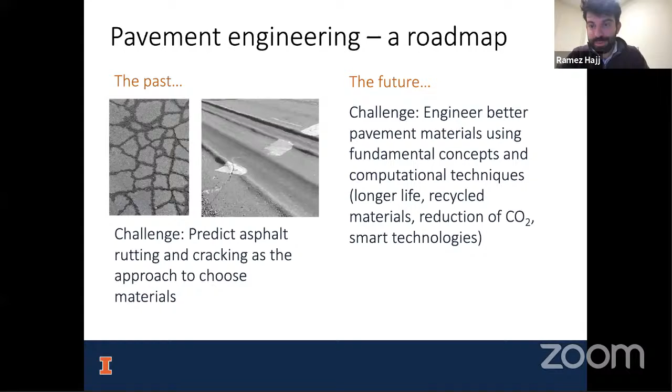Now, in the future, what are our challenges? We need to engineer better pavement materials. We cannot keep going with the same old materials. We've already seen the introduction of polymers and other more advanced materials. As we're doing this, our aim is a longer life, using more recycled materials, reducing CO2, and making our pavements smart. So now we want to take all the things we've done in the first part and apply them here, to challenge ourselves to engineer new 21st century materials that are sustainable.

A lot of the problems in the asphalt world start with the binder. So what is asphalt binder? It's the binding agent in flexible pavements. It's obtained primarily from the fractional distillation of crude oil, but it also occurs naturally. You see some natural asphalts in certain places, like Venezuela and Trinidad. There are certain parts of the world that have a lot of it, but generally for our purposes, we are focused more on this fractional distillation of crude oil. Essentially, this is the heaviest fraction of the crude oil, or the bottom residue, and that's what produces our binder.

And in essence, we mix the binder with aggregates in approximately a ratio by weight of 5% to 95%. And the binder is extremely complex.

If you studied more about concrete, maybe many people here have a background in Portland cement concrete. Portland cement doesn't look too different whether you're in the United States, India, Brazil, Europe, or anywhere. But asphalt binder looks quite different. It has a huge geographic variation because of its complex chemical composition. I won't get into too many details, but the important thing to take away is that every single binder is different, which means every single mixture is different. No two are the same, even if sourced from the same source—different batches from the same source will still have differences. So it's very critical that we think about the complexities associated with the chemical composition and how to properly know what type of binder we want to use.

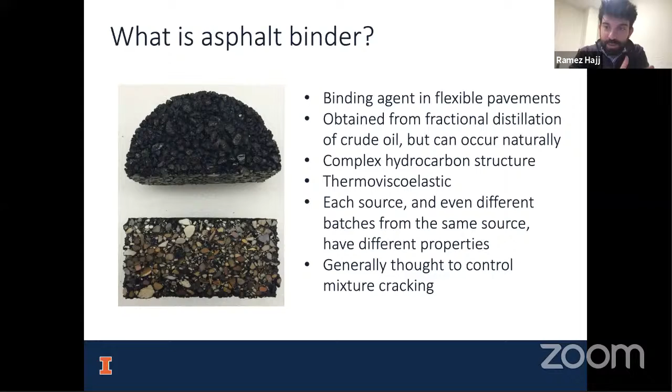Each source, and even different batches from the same source, have different properties. And finally, when we see cracking in the pavement, like I showed on the previous slide, the asphalt binder is generally what's controlling the cracking. So it's extremely critical, and we cannot neglect the binder if we want to talk about safety or sustainability of our road. We have to start with the binder, I believe.

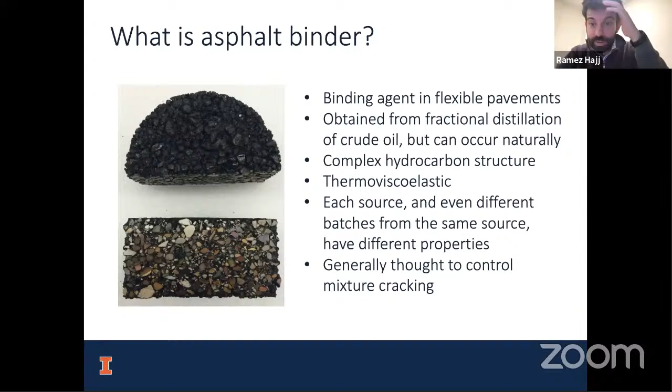Just take a sip of coffee. Okay, it's very early in the morning here.

So what are the new challenges in binder sustainability? Well, there's three I'd like to start off with, and then I'll talk a little bit about safety as well. The first one is recycled asphalt.

We have a chance right now with recycled asphalt to basically revolutionize the paving industry. This is for the United States—I'm assuming there's even more potential in India based on the huge population that Dr. Krishna mentioned. In the United States, we reclaim 90 million tons of asphalt each year, and we recycle approximately 80% of that, so about 75 million tons of asphalt is recycled. Based on this, we can have a cost savings of $30 to $80 per ton, which is pretty huge. But this is quite a large range and really depends on the material quality.

More importantly, we can make a huge impact from a sustainability perspective. When we reclaim the old pavement, we can prevent the need to produce more asphalt. The more reclaimed pavement we can use in asphalt mixtures, the less we have to rely on distillation of crude oil, which is a process that leads to huge carbon emissions, a very big carbon footprint, and is generally not a sustainable practice. So we like to reclaim asphalt—we hope that it's sustainable.

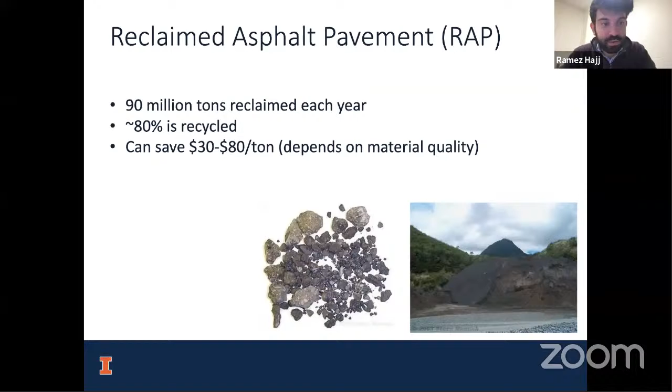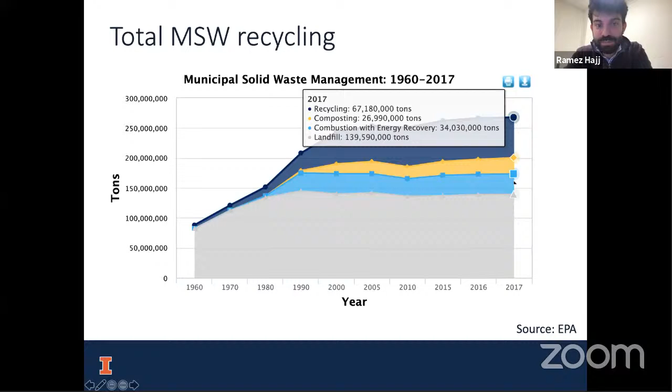Just to give you an idea how big this industry is in the United States: if you look at our total municipal solid waste—things like disposable plastics, disposable aluminum, those kinds of products used in cities—you'll see that 67 million tons of those everyday products are recycled. Compare that to asphalt, where 80% of 90 million tons is recycled—so actually more asphalt is recycled than all these municipal products combined. Just to give you an idea of the scale, asphalt recycling is probably the biggest recycling industry in the United States. Asphalt can actually become the world's most recycled material. This is not a small niche industry—it's a huge operation that involves everyone. And if you can use more and more RAP and maintain good pavement performance, you can see how this can go extremely far in producing sustainable roads.

However, there's still a lot of challenges associated with using RAP. The major challenge is the compatibility between RAP and virgin asphalt. When we heat the RAP material, we have to remember this material is not like our virgin asphalt. It's a very stiff material, heavily oxidized, and difficult to mobilize and mix at normal temperatures. For example, we use about 150 Celsius usually for mixing regular virgin asphalt mixtures. This might not be adequate for RAP because the material is so stiff and has a high adhesion to the aggregate, which creates difficulty for us.

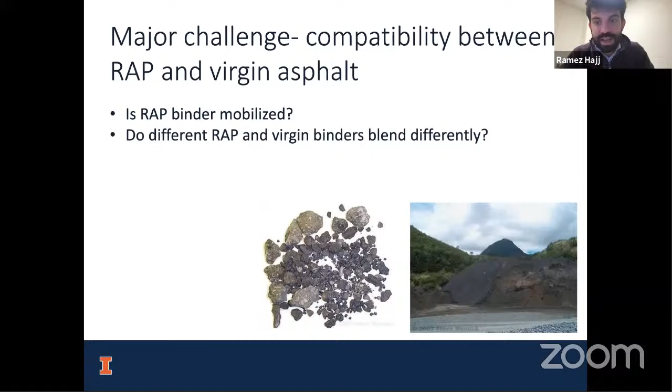The other challenge is certain RAP binders and virgin binders may not be as compatible as others. We cannot just assume every RAP mix is the same. We have to consider compatibility as we move through the process of a RAP mixture design. However, the vast majority of designs do not account for this. They just say, get 30% RAP or 40% RAP and mix this into your asphalt. This won't work well because if it's not compatible with the virgin asphalt, the RAP essentially acts like a rock, which means you'll have an inadequate binder content, and these aggregates will strip or crack immediately.

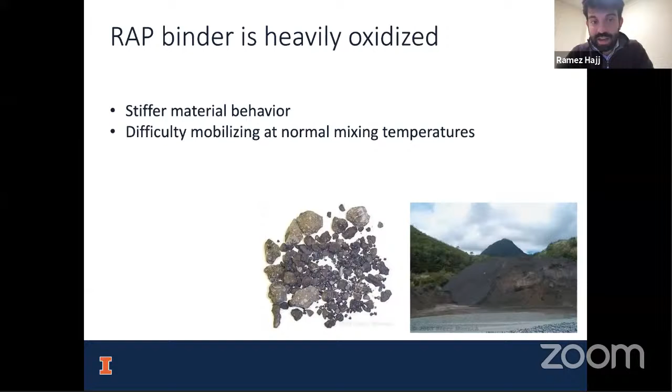You'll have loose aggregate at the surface. Now, when you have loose aggregate at the surface of an asphalt pavement, this creates a huge safety issue because that loose aggregate flies up and hits the next vehicle's windshield and can crack it. So this is not something we can take lightly, and it's something we need to explore.

This is something my research group has been working on. This was a collaboration with Dr. Anand Sreeram and Zhen Leng from Hong Kong Polytechnic University, and the other author is my PhD advisor, Dr. Amit Bhasin from UT Austin.

This is a procedure we developed quickly to check the extent of aging in RAP based on solubility. The idea is you titrate this small specimen with something that dissolves asphalt. When you see solubility appear, you understand how much solvent it takes to dissolve this material, or how much dispersive force this material has. We can easily convert this to the amount of dispersive forces present. If the material is not very dispersive, that means it might create recycling difficulties because the binder is too stiff and too brittle to be mobilized. So we predict this may lead to difficult binders to recycle.

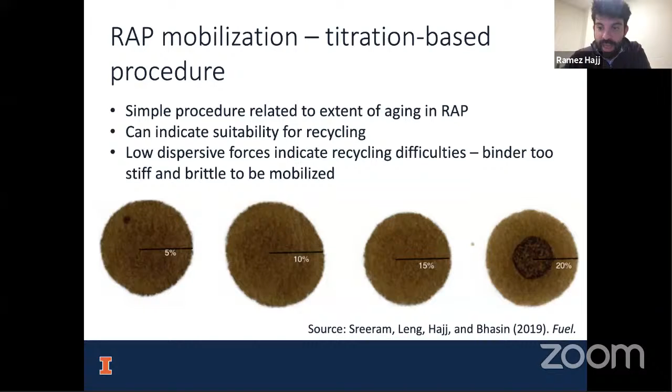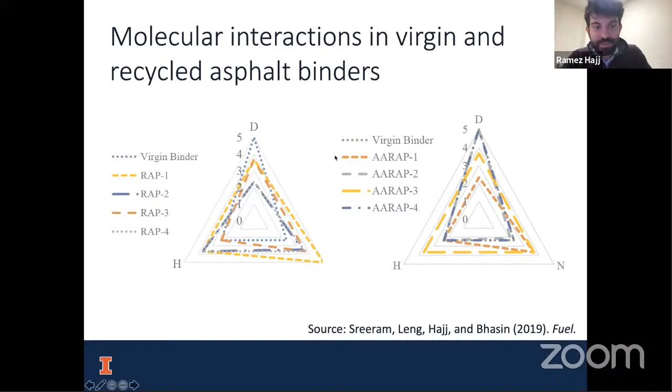Again, we cannot just assume RAP is all the same. These are actual RAP specimens from the field, and these are artificially aged in the lab, and we see that phenomenon regardless. So this is not just an effect of laboratory experiments, it actually occurs in the field as well.

So this is an issue that really needs fixing and needs more study. These 2 papers we've written help bring this issue to the front, hopefully for researchers in pavement sustainability, but we're just scratching the surface now, and there are more unanswered questions than answered ones. I hope that in the future, researchers will focus on developing and understanding how we can create sustainable pavements, but from a scientific perspective, not just treating every material as the same when we know it's not.

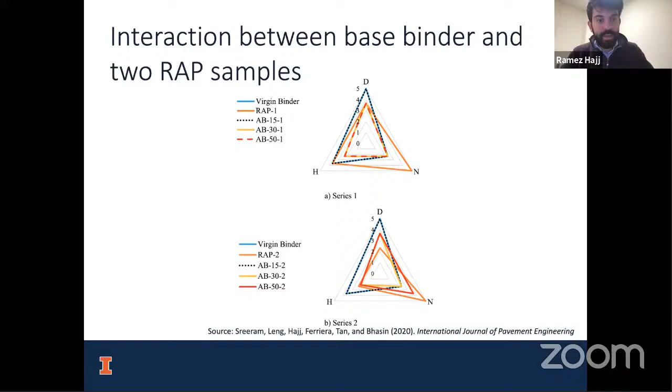Okay, take another sip of coffee.

Okay, so our second challenge is going to be rejuvenation. So what do I mean when I say rejuvenating or softening the binder? Well, the problem we just talked about where RAP becomes heavily oxidized, there is some remedy for this. And what we can do is we can use softeners.

In these softeners, we have many materials. We have rejuvenators. Rejuvenators are often proprietary, and these are kind of on the more expensive side. These are materials that are basically some kind of liquid rejuvenator, a low viscosity liquid that we add to the RAP binder to decrease the viscosity and make it flow more easily. But these are pretty expensive and they're patented materials, so we can't just go use them whenever we want.

So there's been a lot of interest in new softeners or rejuvenators, such as biomaterials. Some of this is animal waste. Some of this also includes cooking oils, so if we're using oil for cooking, we can recycle that in this form. I have done some work in this area also. And then there's high maltene oils, which are just lighter fractions of the crude oil. It's not ideal to use these because it's contributing to crude oil distillation, which we want to reduce. But in some cases, this can be a powerful tool for rejuvenating our binder.

And again, no matter which rejuvenator you're choosing, the idea is the same. You add a low viscosity material to the very high viscosity, stiff, brittle RAP, and this will combine with the RAP to make it softer.

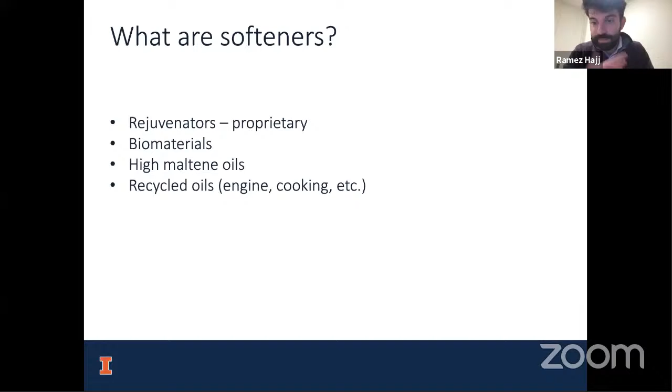But the big question for these materials is, what content should we use? How much rejuvenator do we need? This work is co-authored with one of my PhD students and his master's advisor. And we noticed that in this case, there's a pretty wide range that you can use.

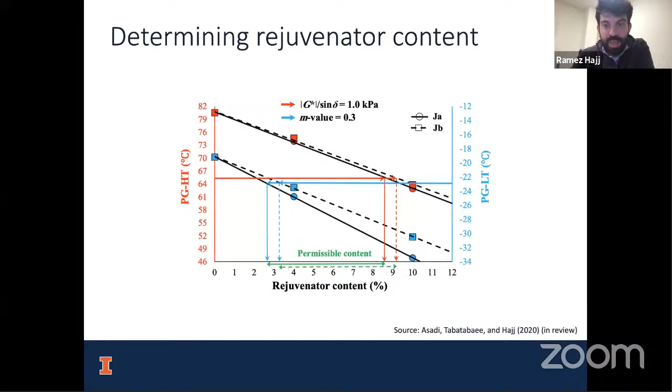So for example, here are two types of rejuvenators. Ja is an industry rejuvenator, and Jb is a waste cooking oil rejuvenator. In both of these cases, you can use almost anywhere from 3% to 8.5%, 9%, and you can still maintain the same grade of your binder based on the PG system, which is the classification system we use in the US. So if you can still maintain your same binder grade in this wide range, you don't have a good idea of how much to use. Should you use 3%? Should you use 9% of the rejuvenator? So we developed a system based on the linear amplitude sweep binder testing method.

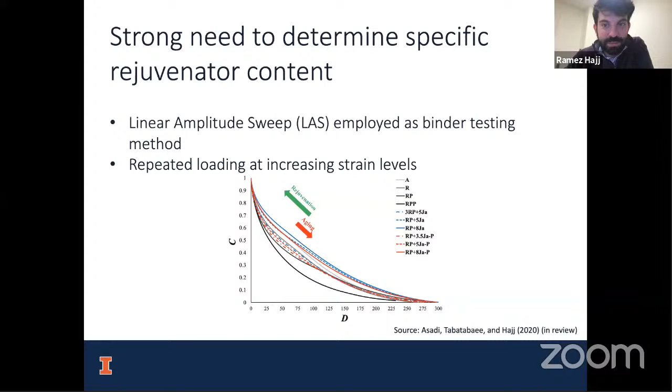The idea here is that it's a fatigue test, where we check what is the fatigue life of the binder from many different perspectives. First, we looked at the damage evolution, and you can see here that the damage at failure of these binders is about 30% for an unaged asphalt. A represents unaged, R is short-term aged, RP is long-term aged, and RPP is doubly long-term aged. These are increasing levels of aging, and you'll see that it takes less and less damage to fail the material.

But then you can see as we rejuvenate it, it starts to go back up. And in some cases, it even passes the original material, which is why I say rejuvenation is a bit of a misnomer. It's not necessarily the correct name for the mechanism, because in some cases, when we add so much rejuvenator, we're actually making the material properties even better than the original material properties. And what this means is that this is not a rejuvenation or restoring of the original properties, it's just a softening.

And we can see that when we re-age it, we're able to keep some of those properties. And then finally, we can do many cycles of rejuvenation and maintain almost the same properties as the original. So this is quite powerful because we can know that we can recycle the material, let it live another life in the pavement, and then recycle it again with the help of rejuvenators.

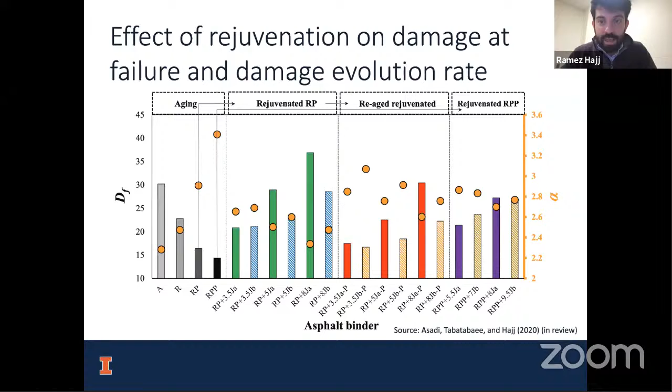We looked at fatigue life too. Same phenomenon here: as we rejuvenate, we see better than the original fatigue life. So even in the unaged original binder, we are able to restore better properties with rejuvenation. This is at a lower level of strain, and this is at a higher level of strain.

Crack growth rate, same thing. Here's our original binder, and here's our rejuvenated with 8%. So the more rejuvenator we use, the better performance we see.

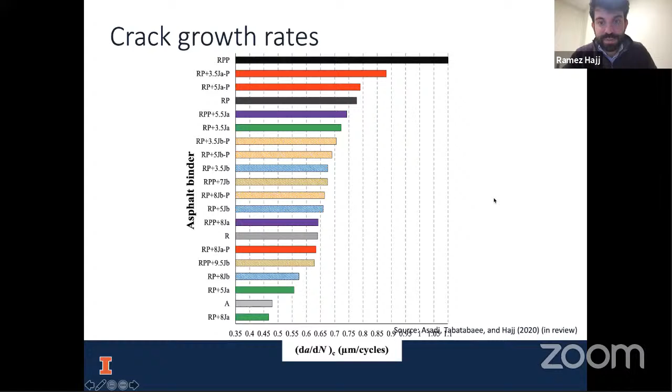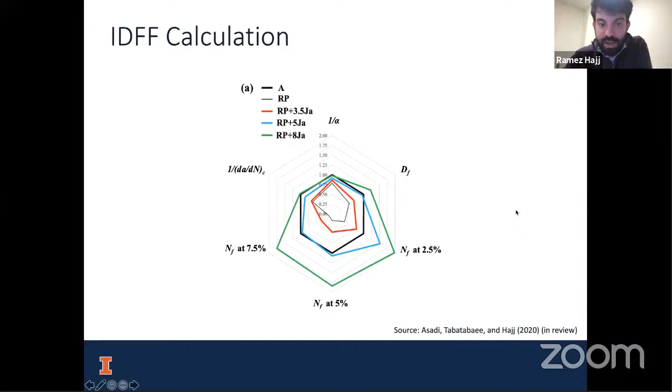And then finally, we created a parameter to help us, based on all those characteristics, determine the most efficient rejuvenation rate, based on the number of cycles to failure in a fatigue test at all these different strain levels, based on the crack growth rate and based on the damage properties. This method allows us to very efficiently choose a rejuvenator content based on how much we want to rejuvenate the binder. So if we want to restore the original properties, for rejuvenator A, we use 5.1%.

This is the aromatic extract. For rejuvenator B, which is the waste cooking oil, we'll use 8.3%. And we have a very targeted choice here. So this helps take the guesswork out of what I discussed before, where we use 3 to 9%. If we only want to restore 75% of the original properties, we can use as little as 2.7% or 3.6% rejuvenator. So this is, again, quite a powerful tool for us in asphalt paving, because this gives us a lot of options to restore those original properties.

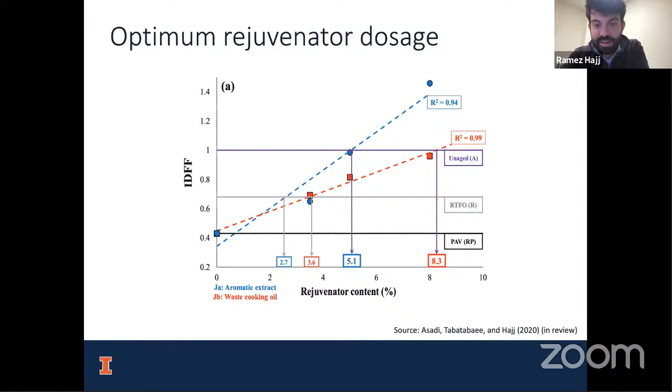And this is really going to be the key to unlocking the use of high amounts of RAP. As I mentioned, we could use 15% RAP without much consequence in the mix, but if we want to use 30%, 45%, 60%, we're really going to have to do something more advanced. This is one way in which we can do it. So this is the kind of work that we are super excited about, and we think can make a big difference to the asphalt industry.

Finally, the last category I want to talk about is new asphalt replacement materials. So when I say new asphalt replacement materials, what am I talking about? I'm talking about materials that we can use as a total replacement for asphalt. The idea is that we eventually want to have mixes where at least 50% of the material is not being used from virgin asphalt sources.

One option is RAP, but as we mentioned, we're already using a lot of RAP, and RAP is still an asphalt mix - it still has a lot of the same drawbacks. So we are investigating new materials. One of the most common ones you might have seen come into play recently is, of course, the use of recycled waste plastics. Recycled waste plastics in asphalt materials is a huge new popular area that has caught on a lot. And this is an area that, if we can find a way to do it efficiently, can really change the world of asphalt paving.

So when we use, for example, recycled waste plastics, we need to make sure it's compatible. If we want to use it for, say, 50% of the mix, we have to make sure it's compatible with asphalt, and this is no easy task. So we have all these plastic wastes right now - plastic spoons, forks, plastic dishes, all sorts of things that we want to recycle. And all of those are a little bit different, so we have to figure out an appropriate way to recycle these without compromising performance or safety of the asphalt mix. But today I didn't want to talk about plastics too much because I think this has been talked about. I wanted to talk about another project we worked on that had to do with sulfur.

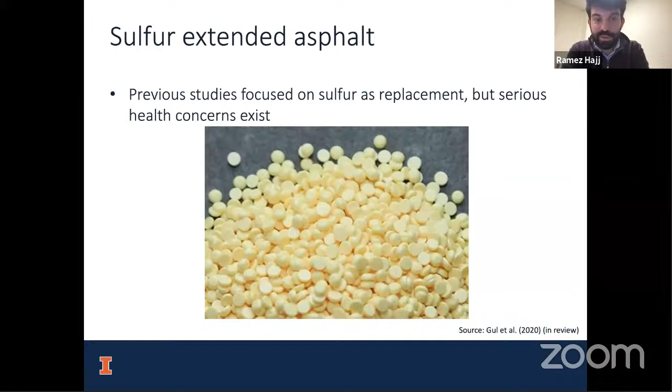So in this case, we evaluated sulfur extended asphalt mixtures using two tests: the Hamburg wheel tracking test and the Illinois flexibility index test, also known as the IFIT.

The Hamburg wheel test is a typical rutting test. This test is used to apply big steel wheels to the top of the asphalt mixture, and we check how much permanent deformation occurs in the wheel path. This is analogous to rutting.

Rutting is one of the most unsafe asphalt pavement distresses, because in pavement that ruts, you will have a depression in the wheel path. When it rains, these depressions fill with water and the vehicle will not be able to stop because there's water in between the tire and the pavement. This is going to create a huge problem for us if we are not careful. So we definitely want to make sure the rutting performance is just as good.

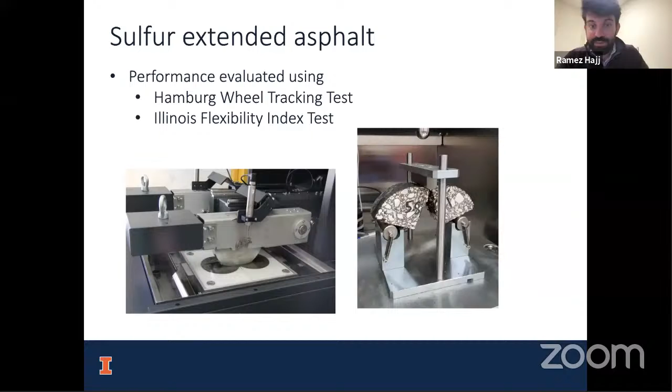And then we have the cracking performance. Cracking leads to infiltration of water into the structure and destruction of the pavement structure. So if we have either rutting or cracking, we're going to have huge structural issues, which lead to huge safety issues. These are very important and very critical tests to run on any replacement material. If your replacement material is not performing as well as your original asphalt mix, your technology is not sustainable and it's not safe. So we have to check these things before incorporating any such technology.

Rutting actually generally improved with the addition of sulfur. The most permanent deformation was observed with 0% sulfur. Then as we increased to 15, 30, and 45%, we saw a continuous decrease, although these are all statistically very similar. We did see quite a good impact of the addition of sulfur, so we felt good about using this from a rutting perspective.

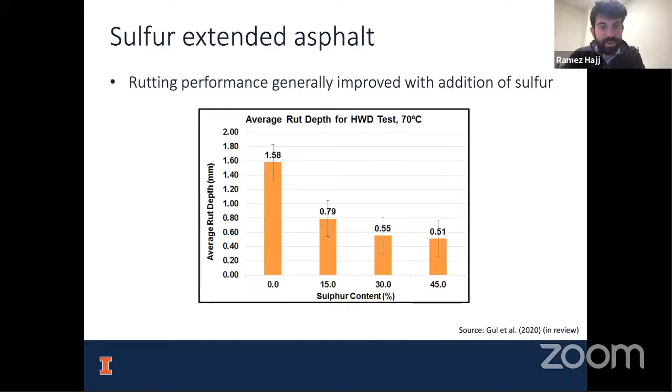However, what about a cracking perspective? We saw more mixed performance, to be honest. At 0%, we did see the highest fracture energy, meaning it takes the most energy to fracture the mix. So the non-sulfur mix performed a little better, but the peak load of the 30% sulfur mix was the highest.

This is important because fracture energy is how much energy it takes to fracture the mix, meaning how much it can deform and strength combined. The maximum load is just the pure strength of the mix. So we did find better strength, but a little bit worse fracture energy when we use 30%.

So in this case, we suggest exploring it more, and that this could be a viable alternative, but we need to be very careful with cracking performance. Frankly, there needs to be a lot more study toward how we can reduce that mixing and compaction temperature even further and maintain similar performance. The reason, again, is because of worker safety. We cannot compromise worker safety.

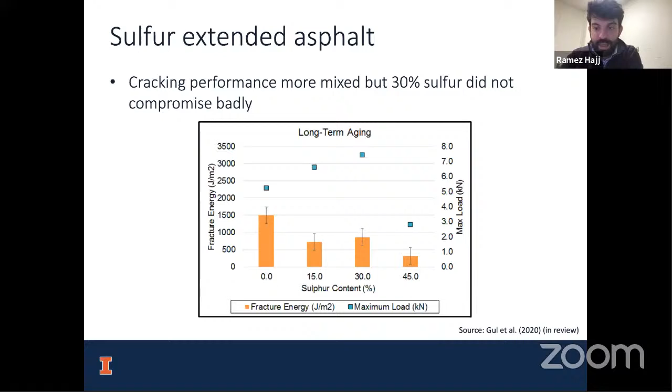Which leads me finally to my last topic: safety in pavement engineering. A lot of people think of safety as an operations problem, the people doing transportation operations, managing intersections and signal timings and things like that. But actually safety is also a huge problem for pavement engineers, and you cannot get involved in pavement engineering without talking about safety.

In this case, we're talking about restoring the surface friction. So the question is, why is surface friction important? It's extremely important because it dictates the interaction between the tire and the pavement surface.

If there is zero friction, the tire will just keep sliding even when you apply the brakes, and this is not good from a safety perspective. Now, if there's too much friction, you will have to apply a huge acceleration to accelerate, and the problem there is you are using a lot more fuel to do that.

This is not really sustainable either if you have too much friction to overcome. So we need to balance safety with sustainability. This is one situation where they're a little bit out of sync with each other. So we need to be very careful when we say we're trying to do safe pavement engineering, because we want to restore the surface friction without compromising sustainability and without compromising the performance of the pavement.

We also don't want the ride to be very rough. Many have seen, for example, concrete pavements are generally a little bit rougher, a little bit more noise. That's one of the big advantages of using asphalt. So if we're going to use asphalt paving, we have to be thinking about reduction in noise and reduction in friction enough to be sustainable, but we cannot reduce it too much because it has to be safe.

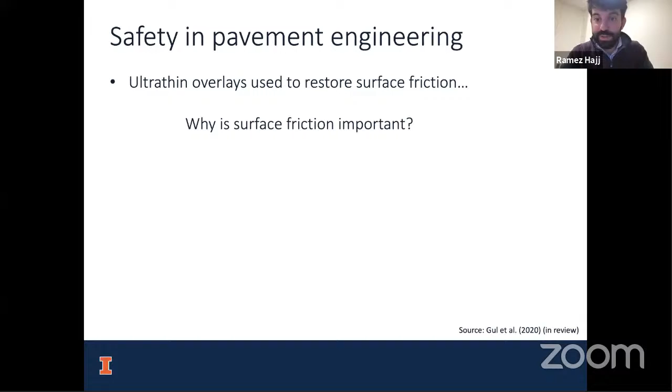The only way that a pavement can be safe is with a good surface friction and a good interaction between tire and pavement. So we did one project here where we looked, this was at UT Austin as a grad student, at safety in pavement engineering from a surface friction perspective. We applied cycles of loading of what we call a three-wheel polisher, basically 3 pneumatic tires applied to a pavement surface or a surface of a lab specimen of asphalt mix. The idea here was to create some ultra thin overlays.

The reason is, as a pavement's life progresses, you will see that the friction basically gets worse and worse because tires tend to polish the existing aggregates. So the surface friction interaction between tire and pavement gets worse and worse as time progresses. What you will notice is a huge problem in terms of skid resistance or friction resistance in later ages.

So typically what we do is we apply surface treatments. One such surface treatment is a seal coat. This is a single-sized aggregate adhered to the surface of the pavement with a binder. This creates a nice friction surface, a good texture to restore that interaction between tire and pavement so that vehicles can stop in an appropriate manner.

However, this procedure is a little bit complicated, especially in the US, because the technology to use it had a patent on it. So we were wondering, could we use just a half inch of a simple asphalt mixture of different types, and could we get the same surface friction?

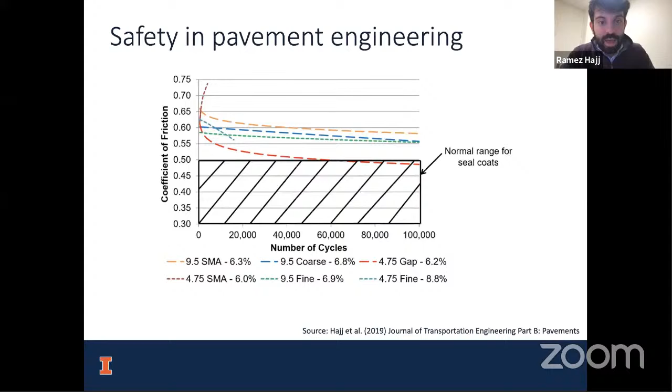I think this is the greatest accomplishment any of us can say we had as transportation engineers. So with that, I'm right at the 40-minute mark, so I'm going to conclude my presentation.